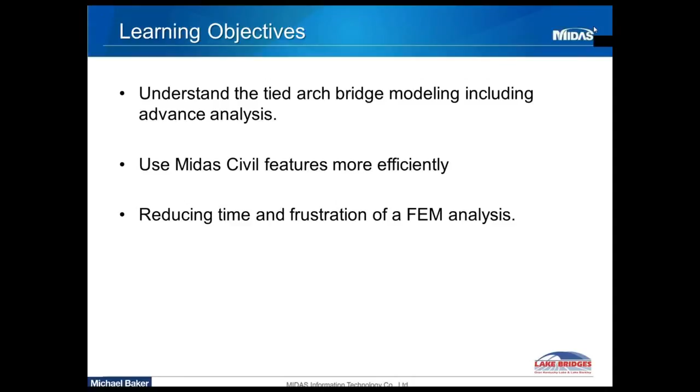What I'm going to talk about today is the modeling and analysis of the new Kentucky Lake Bridge, which is a 550-foot basket handle network tie arch bridge. Today's webinar learning objective is to understand the modeling of the tie arch bridge, including the advanced analysis. We'll also learn how to use Midas built-in features more efficiently, which will reduce the time and frustration during the finite element modeling.

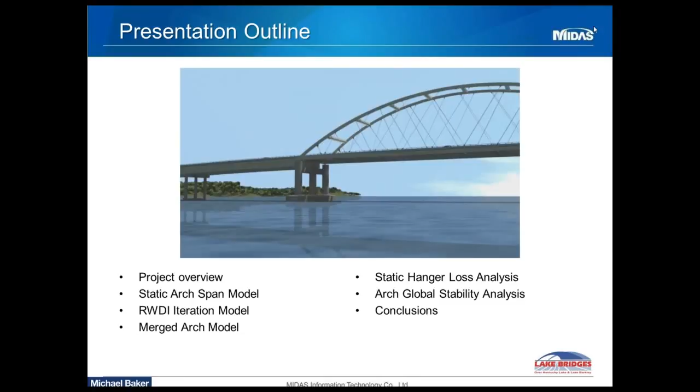Let's go through the presentation outline quickly. I'm going to talk about the project overview of the Kentucky Lake, then we will go through several different models, like the static arch model, the RWDI iteration model, the merged arch model with a local complex model, the static hanger loss analysis, followed by the arch global stability analysis.

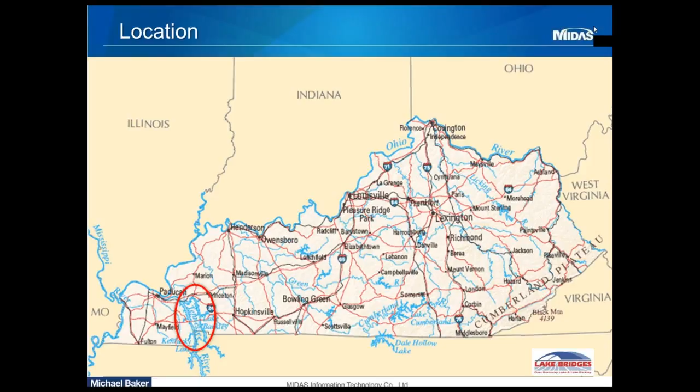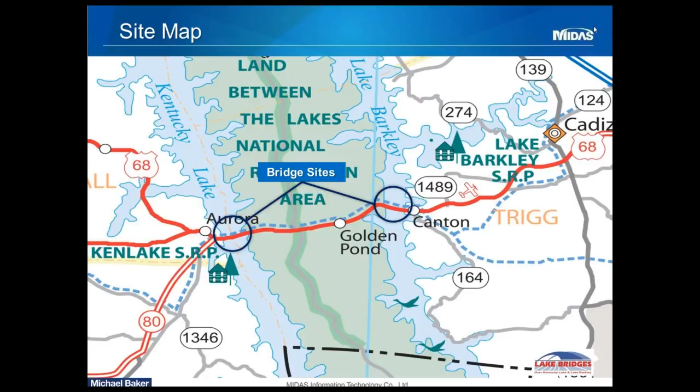So where is the Kentucky Lake project? It is located at the western part of Kentucky and provides a vital access point to the Land Between the Lakes National Recreation Area. Our client, Kentucky Transportation Cabinet, KYTC, will be replacing 2 of the bridges with identical tie arch bridges over Kentucky Lake and Lake Barkley. The Kentucky Lake crossing was awarded in December 2013, and the Lake Barkley crossing will be advertised a year later, by the end of this year.

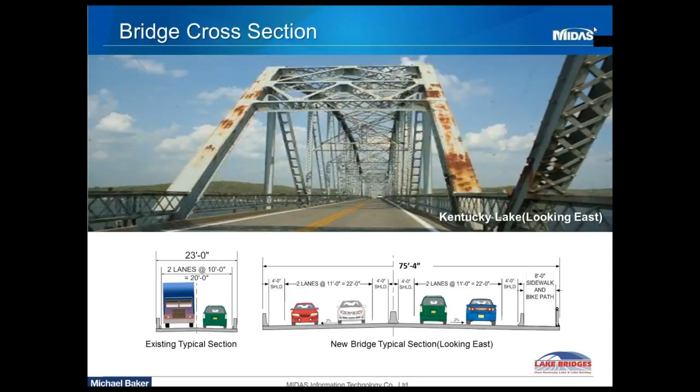The new bridge will replace the existing structurally deficient and functionally obsolete Eggner's Ferry Bridge, shown at the top of the screen. The existing bridge is only 2 lanes, 23 feet wide, a truss bridge. The new bridge, on the other hand, is 75 feet 4 inches wide, carrying 4 lanes of traffic with an 8-foot multipath or sidewalk across the lake on US 68 and Kentucky 80.

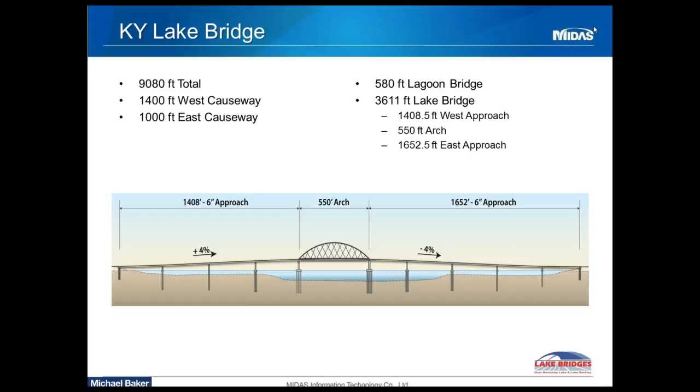The Kentucky Lake crossing is a total of 9,080 feet long, including a widening of the 2,400-foot existing causeway and also the 580-foot lagoon bridge, which is not shown on the screen. The west approach span is about 1,400 feet long, followed by the 550-foot tie arch bridge, and a 1,650-foot long east approach span. Both the west and east approach spans are continuous span welded steel plate girders. The general public and the Citizen Advisory Committee determined the signature structure to be the basket handle tie arch bridge for the main span.

Well, what is the tie arch bridge? In general, a tie arch is an efficient long span structure, and the tie arch imposes horizontal thrust because of the curvature of the compression ribs. The load path of the bridge starts from the deck hanging down from the hangers, and it ends up with the thrust coming down from the ribs to the knuckle, resolving into the vertical component that goes down to the bearing. The horizontal forces are carried by the tie girder.

So why did we pick Midas Civil as our finite element program? Because the Kentucky Lake tie arch bridge is a long span complex bridge, we need to build a rigorous 3D model for this project to determine the demand and to analyze the complex components of the bridge. Midas Civil is very user-friendly and has Excel-compatible table features that increase modeling pre- and post-processing efficiency. It also integrates with various advanced analysis tools, such as moving load, construction stage, eigenvalue, buckling, and nonlinear analysis.

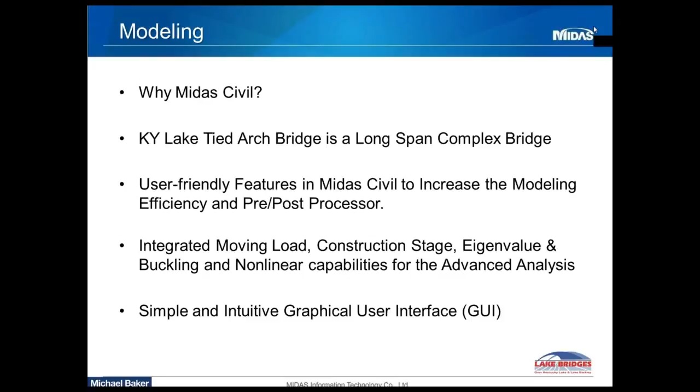Midas Civil is also equipped with a simple and convenient graphical user interface. Let's move on to the introduction to the modeling.

For me, I always ask myself, what is the purpose of the model? What are we trying to accomplish, and what are we trying to get from the model? We always start simple in the modeling, always doing a 2D model first, then evolving into a more complicated model. It's easier to debug a simple model than to debug a complex model later on. It's also important to understand the program's capabilities and limitations, what the program can do and what it cannot do, so that we can make certain assumptions in our analysis.

I always have a modeling checklist with 4 primary items. The first is the geometry of the model. The second is section and material properties of the model, the boundary conditions, and the last one is loading. It serves as a reminder and also a step-by-step guide for input into the model.

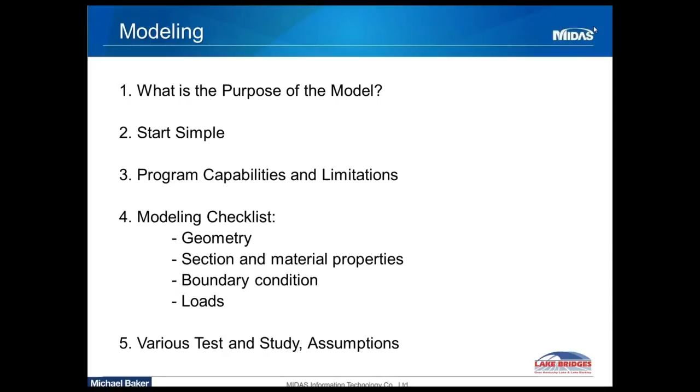The last is to perform various testing and study, and it's always good to do a simple benchmark problem so that you get familiar with the program and understand the analysis that we try to do later on.

Speaking of this point, we did a lot of design studies and analysis for the Kentucky Lake project during preliminary design phase. The first study that we did is to look at the network hanger versus vertical hanger on the tie arch bridge.

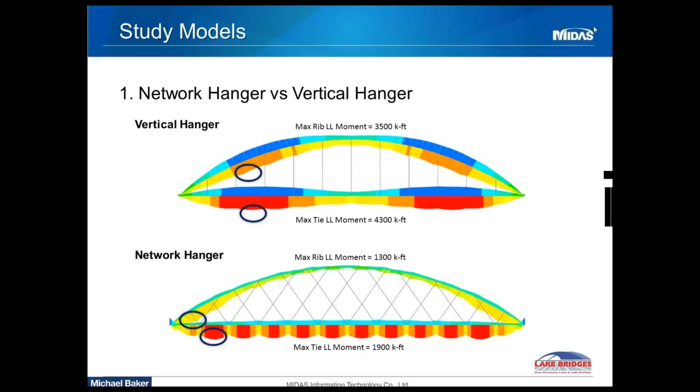The study demonstrated that the maximum live load demand on the tie and rib using a network hanger system is 40% of using vertical hangers. The numbers you see right now don't necessarily represent the actual live load demand used for the final design of the bridge, but it's one lane of HL93 applied to the bridge for the study, just for comparison.

The second study that we did for the Kentucky Lake is look at the integral floor system versus floating floor system. Basically, integral floor system is stringers framed into the floor beams directly, while for the floating floor system, stringers sit on bearings and connect to the floor beams.

The integral floor system offers several benefits, such as it eliminates the stringer bearings and joints from future replacement, while it also imposes a challenge to the deck system because it introduces a creep and shrinkage force from the deck to the stringers and to the connection, and introduces lateral bending stress to our floor beams.

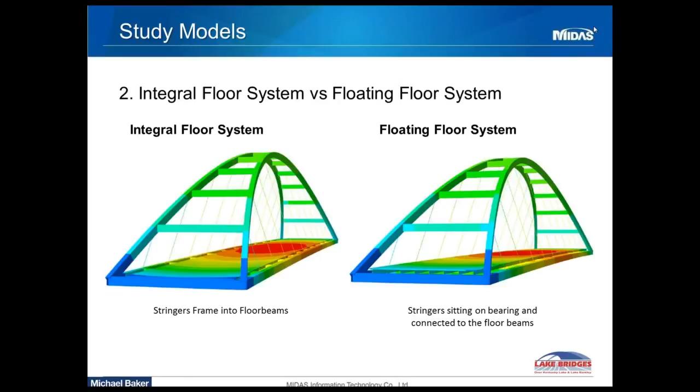However, the cost is much lesser to use the integral floor system compared to the floating floor system because of the maintenance and inspection of the stringer bearings. And finally, we selected the integral floor system for our final design of the Kentucky Lake bridge.

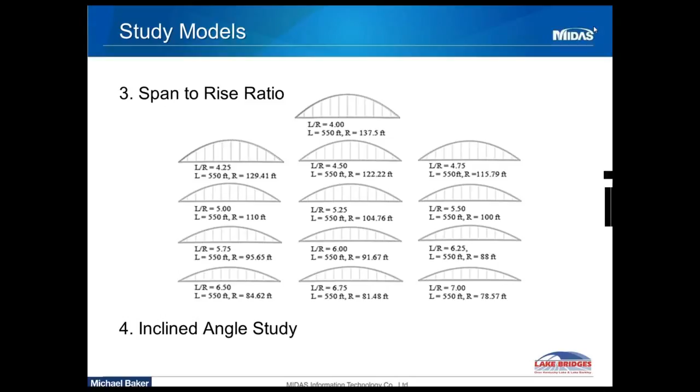We also looked at different span to rise ratio, varying from a ratio of 4 to 7, as you can see on the screen. We also looked at the incline angle study by looking at the lateral stability of the bridge, eigenvalue, and mode shape of the bridge with different incline angles.

The last study we did is to look at the multi-use path. Because the Kentucky Lake bridge is very close to the Kentucky Lake resort park, the need for the bike path was amplified. We looked at whether to place the multi-use path inside or outside of the arch.

Using Midas Civil allowed us to input pedestrian live load on the model, so it would generate the maximum live load effect to the bridge by doing both study, modeling inside and outside of the bridge.

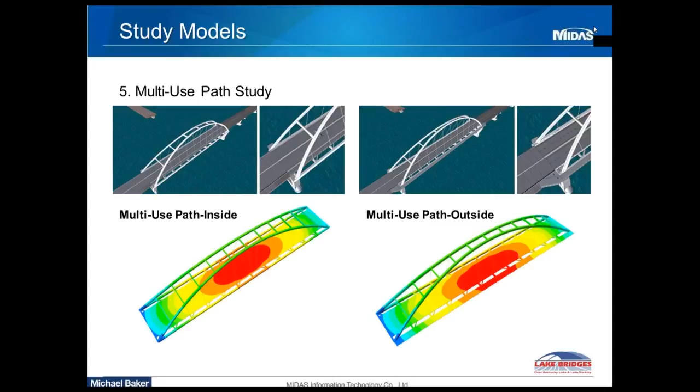We selected the multi-use path inside the bridge because it's preferred by our client to allow future widening of the lane, the live load, to become 6 lanes of live load.

So after multiple testing, study, and experiment, as you could call it, the simple model finally evolved into a final 3D arch model.

The final geometry of the Kentucky Lake bridge is 550 feet long from center line of bearing to center line of bearing. It is 94 feet wide from center line of the tie to center line of the tie. And it's 110 feet tall on the 15 degree inclined plane.

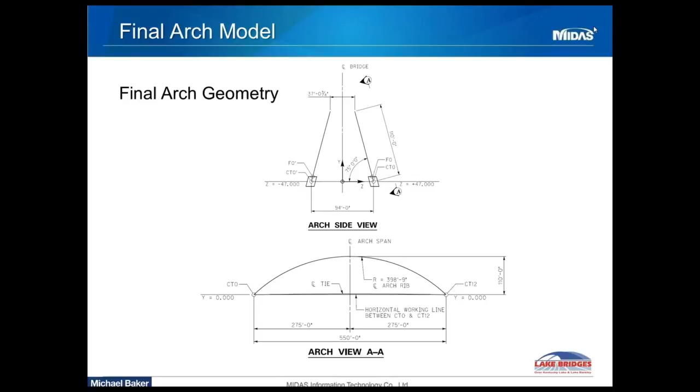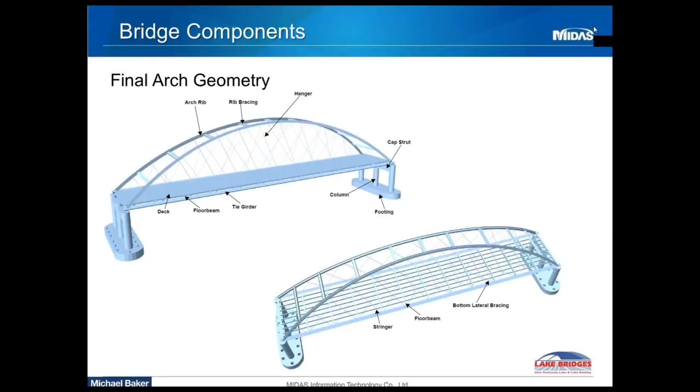On the final 3D arch model, we model everything as a beam element except the deck of the superstructure and the footing as a plate element or shell element. We model the hanger as a truss element, which I will explain later why we're doing it.

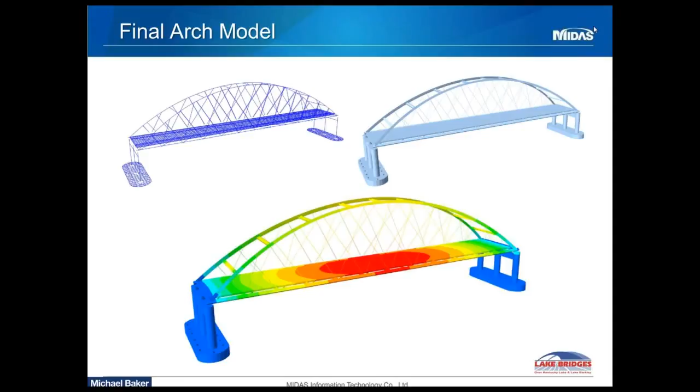Here are some of the screenshots from the final arch model. The final arch model is a linear model that allows us to do static analysis and allow the load superposition, which is preferable to facilitate the member design.

Because we're doing the linear model, we have to check the hanger, which is modeled as a truss element, to make sure that the assumed elastic modulus that we made is always true or valid to be used.

Midas allows the user to assign individual load cases, which is very helpful because if there's any changes to the load in the future, it can be updated easily.

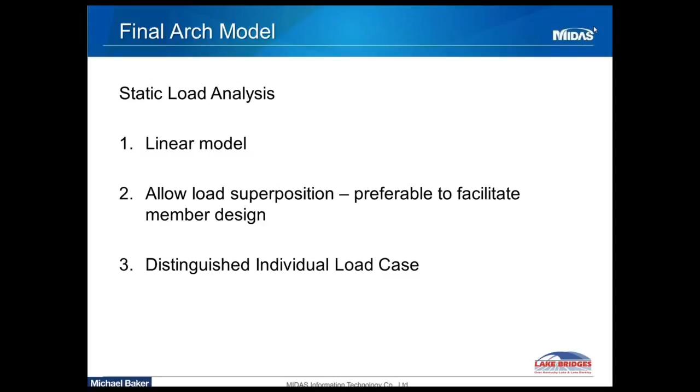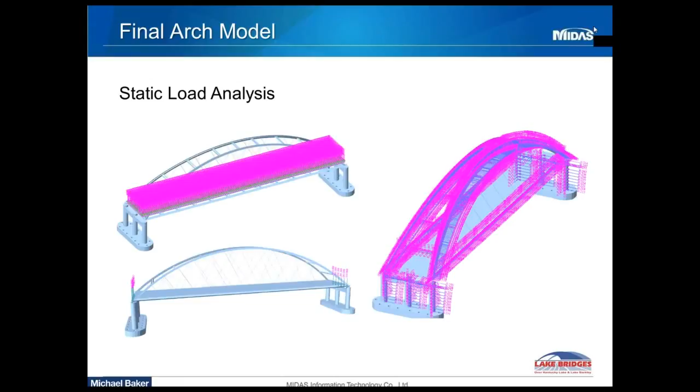A few examples that Midas allows the user to input different types of loading. First is the plate pressure load, which is applied as a future wearing surface on the deck. Midas also allows the user to input nodal loads, which we use in this case as the approach span bearing load. And the screen on the right shows that Midas allows the user to input beam element loads, which we use to apply our RWDI wind load to the model.

In this final arch 3D model, we also do construction stage analysis to simulate the real-time construction. On the Kentucky Lake bridge design and analysis, we assume the tie arch bridge is constructed on land and floated in.

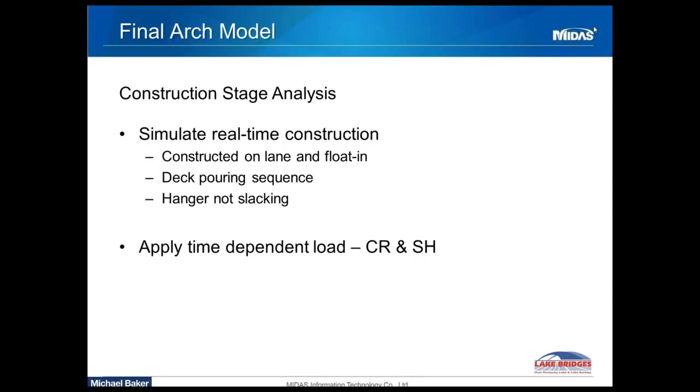We also include the deck pouring sequence in our construction stage analysis to check that our hanger doesn't go slack, and also to check that the hanger's assumed elastic modulus remains true, allowing us to use load superposition later on. We also apply the time-dependent load in our construction stage analysis, which is the creep and shrinkage load.

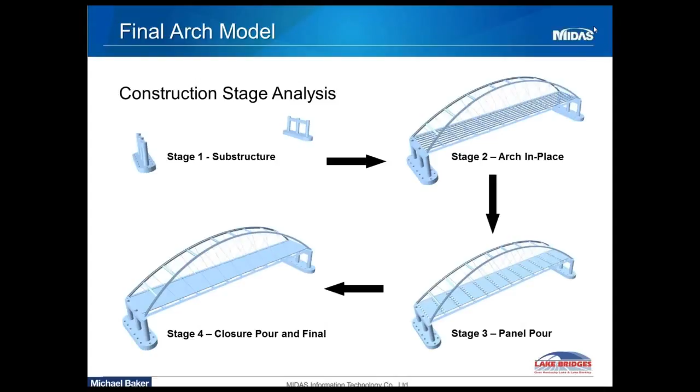These four figures show the construction stage that we assume in our analysis. It started with the substructure constructed in the first stage, followed by the float-in of the arch, and next is the panel pour of the deck. Then the last construction stage is the closure pour and the deck overlay.

Once the construction stage is analyzed, it will become the post-processing model for the moving load analysis. The moving load analysis in Midas is very useful because it can place the live load on the bridge to generate the maximum or minimum live load effect on the members.

In Kentucky Lake, future six lanes of live load were used, which includes the future widening of the bridge. Four-stripe-lane live load is used for hanger loss analysis and also the tie fracture design—I'll talk about the hanger loss analysis later on. Midas has the capability to allow users to scale up and model different live load that is not included in the live load library of Midas.

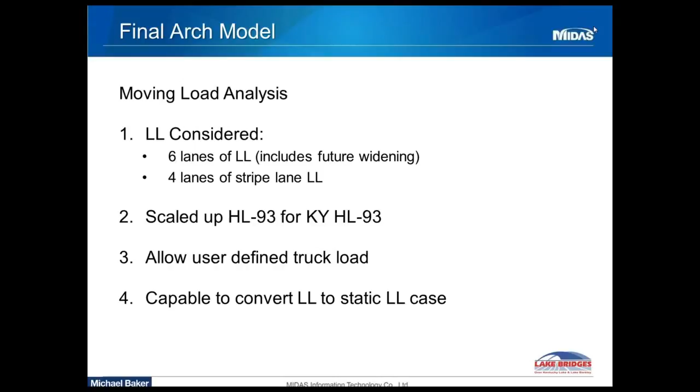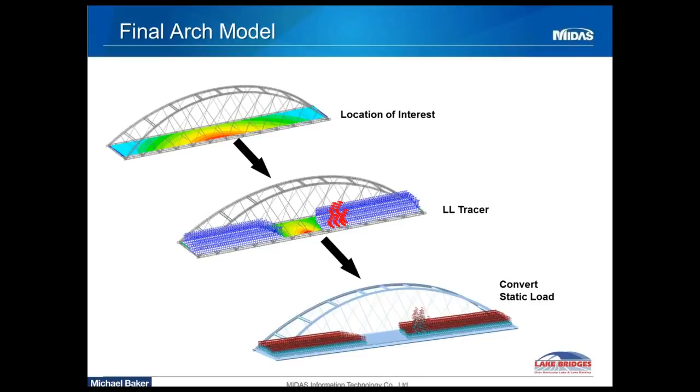Another helpful feature is that it allows users to convert the critical live load to a static load case. For example, we are interested in the critical forces of one of the members of the arch, let's say on the middle of the bridge tie location. So in Midas we can use the Midas live load tracer to show us the live load pattern that generates the critical live load case, and then we can convert this live load pattern to a static load case, which is very helpful for our advanced analysis.

Baker retained RWDI to conduct a wind engineering study on Kentucky Lake Bridge, and we are required to provide the structure mass and eigenvalue analysis result to RWDI for the wind buffeting analysis and the wind tunnel study.

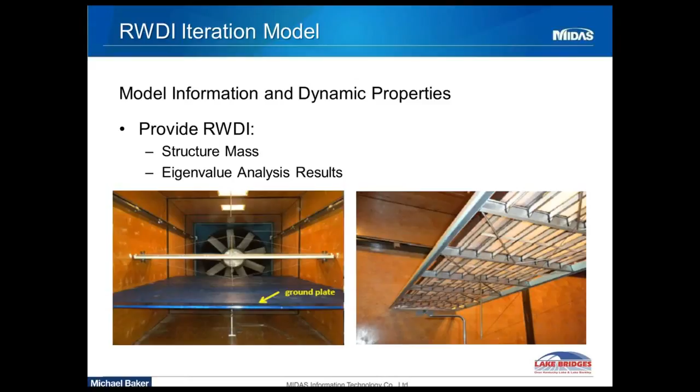Midas is capable of performing eigenvalue analysis, and the dynamic results can be easily extracted in table format from Midas.

Because the bridge is supported by deep pile bents and waterline caps, we do the substructuring between the deep foundation and anything above. The deep foundation will show its model in another program, so we have to do iteration between these two programs to come out with the converged 6x6 stiffness matrix.

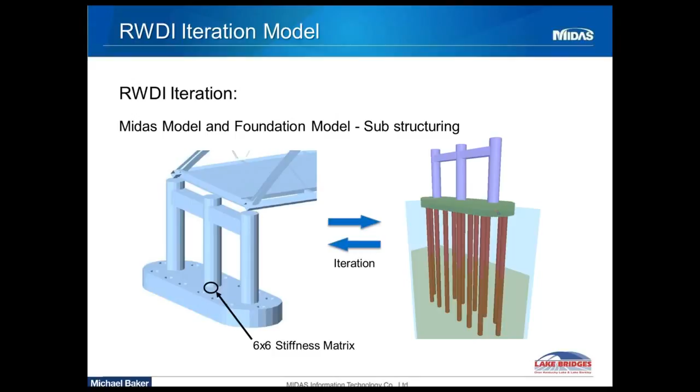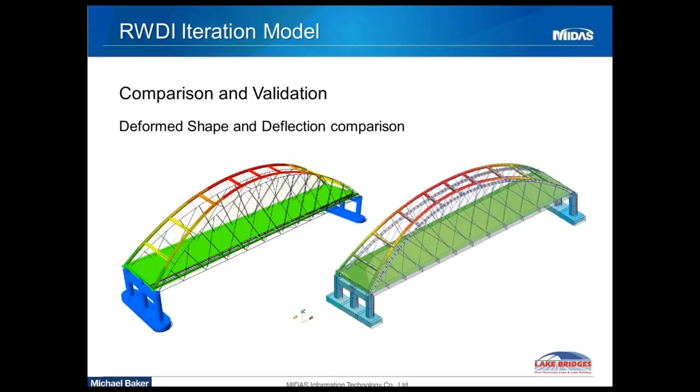Then we provide this information back to RWDI to finalize their wind tunnel study. RWDI will send us back the RWDI wind load, static wind load, to be applied in the Midas model. There are a total of 28 load cases of RWDI wind load that we need to apply into the model. The last step is to compare the deformed shape and deflection magnitude for the 28 load cases with what was provided by RWDI, to make sure that the result and the load applied is valid and comparable.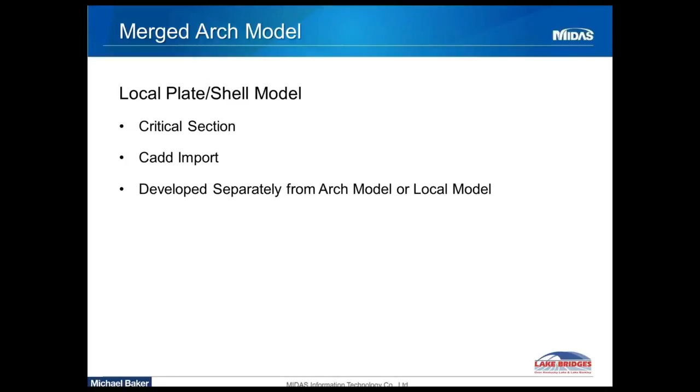Then we extend our modeling effort to develop the local plate and shell model to analyze and look at the critical sections of our bridge. Midas has the capability to import CAD files and convert them to a finite element model, which is very helpful because different people can develop the model separately and merge it together later on.

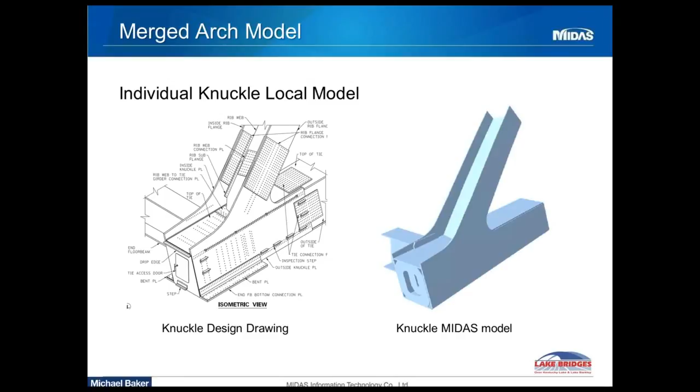One of the most critical sections for an arch bridge is the knuckle, which is located at the intersection between the tie girder, rib, and end floor beam. A knuckle is a highly stressed area, complicated by its geometry for fabrication. As you can see, on the left is the drawing of the knuckle, and on the right is the knuckle Midas model.

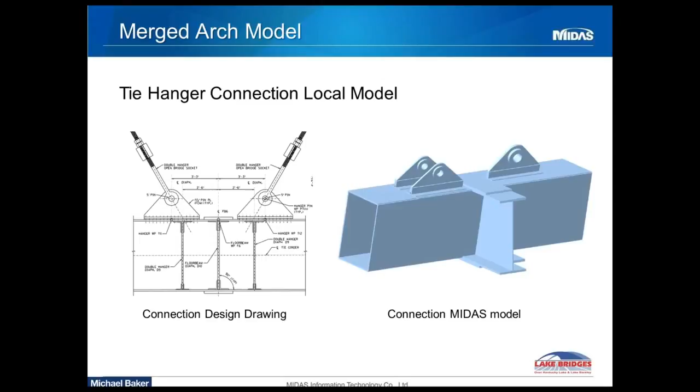Another section we are interested in is the tie hanger location. These two sections will merge into our arch model, which I have shown previously, and we analyze the model to get the demand from the merged model and compare it with our hand calculation. This really increases our confidence in the complex member and connection design.

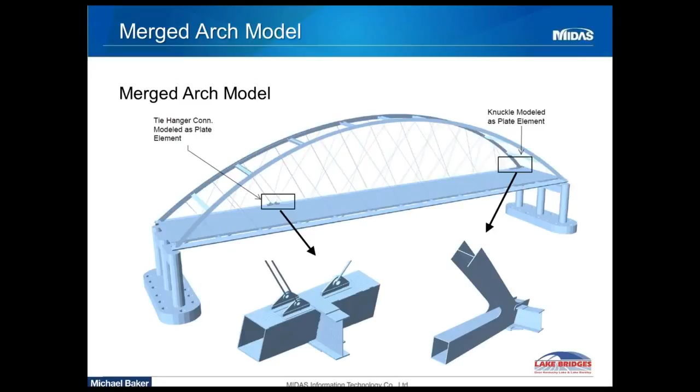In order to connect the local plate shell model to our beam model, we use a transition element called a spider link. The spider link is actually a beam element which is very stiff flexurally, but with a moment release or pin at the plate elements, thus preserving rotational continuity without applying in-plane bending on the plate elements. The link is very soft axially and allows the Poisson effect in the plate elements without over-constraining the member and creating false stresses.

We impose the limit of the detail model using engineering judgment and by applying St. Venant's principle, which means that the boundary condition is set at least a girder depth away from the area we are interested in looking at.

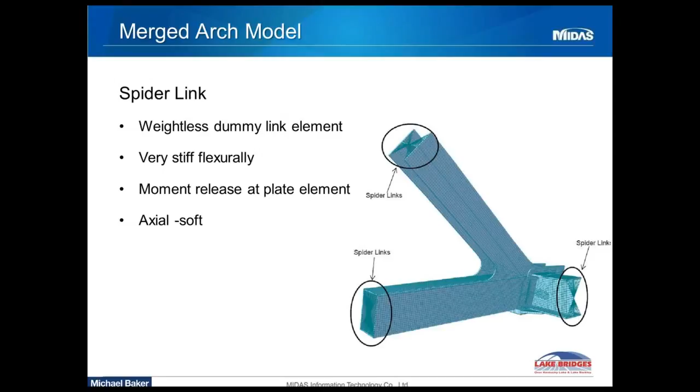So we design the knuckle by checking the effective stresses or equivalent stresses of the element, by imposing the Von Mises criterion. It can be seen that the higher stress originates from the ribs and flows through the knuckle plate and to the bearing, shown on the left side of the screen.

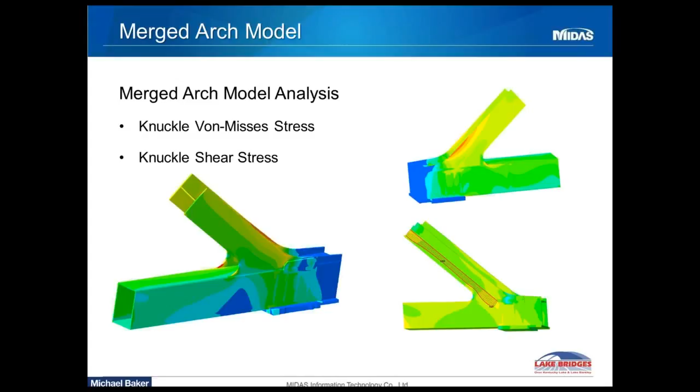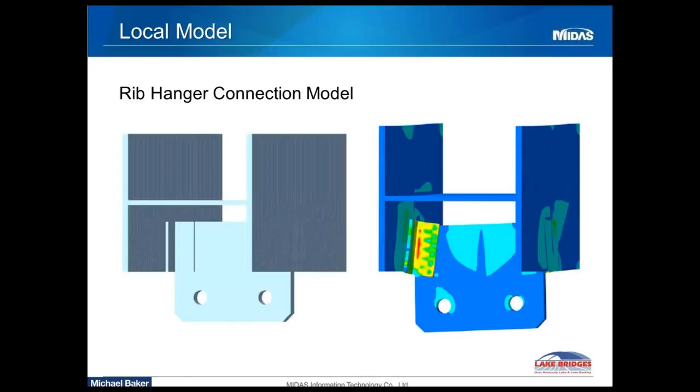Another local model that we built is to check the connection design of the hanger to the ribs. So we perform nonlinear material analysis to predict the connection stresses. Here's a quick animation of the analysis.

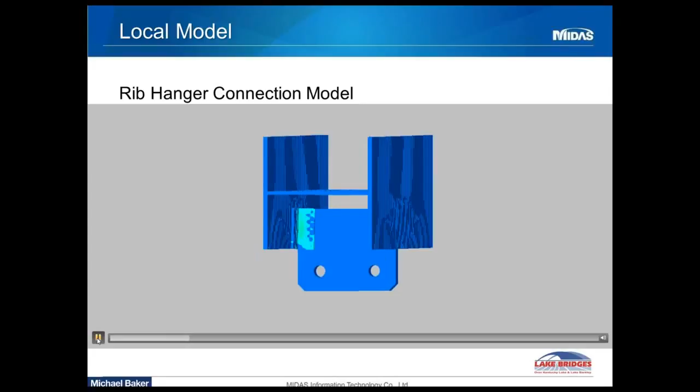Next, I'm going to talk about the static hanger loss analysis. The hanger loss, or hanger exchange, is analyzed in accordance with the PTI recommendation for stay cable design, testing, and installation, 6th edition.

So here are the cable loss and cable exchange load combinations. For cable loss, it's 1.1 DC plus 1.35 DW plus 0.75 live load and impact, plus a 1.1 factor of the cable loss dynamic forces. I will explain what the cable loss dynamic forces are on a later slide.

But the live load that we use in the cable loss is actually the full live load placed in the striped lanes, which is four striped lanes for the Kentucky Lake bridge.

The cable exchange uses 1.2 DC, 1.4 DW plus 1.5 live load and impact, and also the cable exchange force. But the live load used in the cable exchange is actually at least one lane of the live load shifted away from the cable under exchange.

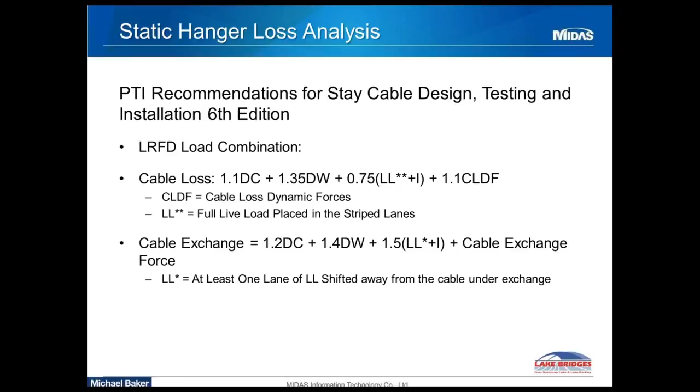So for Kentucky Lake, we use the four striped lanes of live load for the cable loss, and two lanes shifted away for the cable exchange load case.

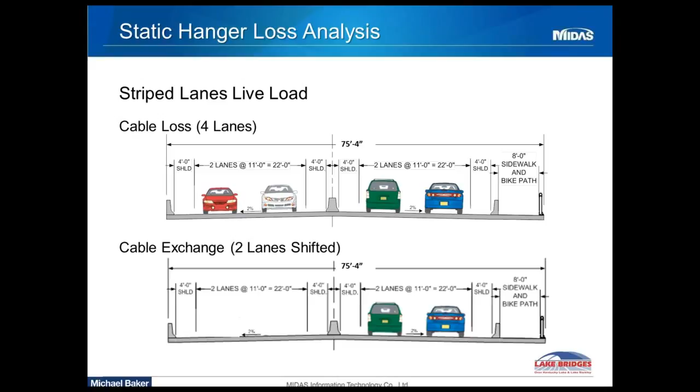There are 3 basic steps to perform the static hanger loss analysis. First step is to apply the dead load to the base structure with all cables intact, which we call System 1 model. We can use the construction stage model to capture the dead load of the structures.

It is also followed by applying the live load to the same base structure with all cables active. This is how Midas uses the post-construction stage model and applies the live load on it.

The last step is to take the maximum dead load and live load of the hanger from Midas and multiply it with the dynamic factor of 2, then apply it in the opposite direction of the original cable tension force with one of the cables removed. We call this model System 2.

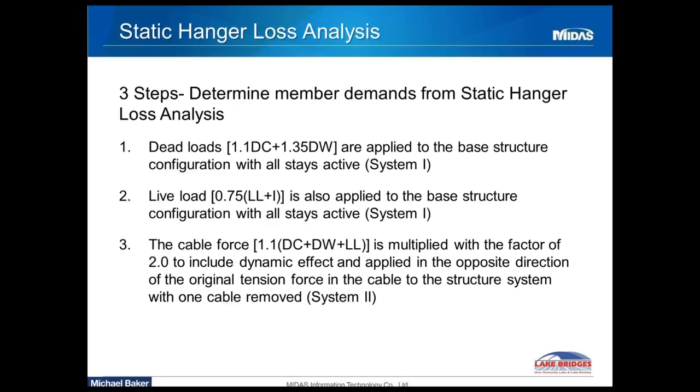I mean, pictures tell better than 1,000 words. So the first model is the System 1 model, which is the base structure with all cables active. This basically represents the construction stage analysis model that we've done, capturing all the dead loads of the arch.

Then the second step is basically using the same model with the live load applied on the bridge. Then the System 2 model is used to obtain the cable loss dynamic forces.

So basically it's by removing one cable from the System 1 model and applying the dead load plus live load, with the 2.0 dynamic factor applied in the opposite direction where the cable is removed, to get the System 2 forces.

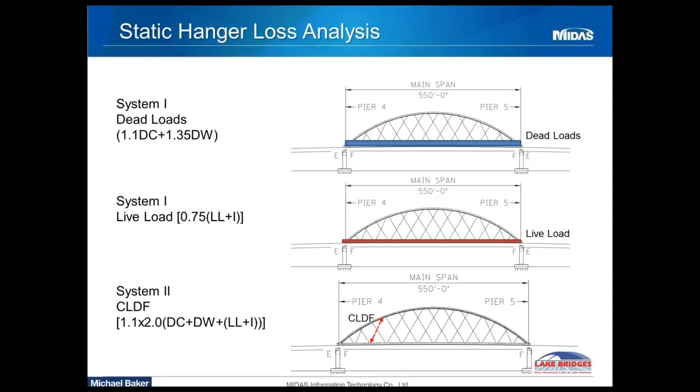These forces are then superpositioned, becoming a static hanger load combination used to design the components of the arch. As shown in the figure and chart, you can see that the cable loss introduces a large in-plane moment to the ribs and tie.

This is one load case by removing one of the hangers, and it needs to be done for all the hangers on the arch.

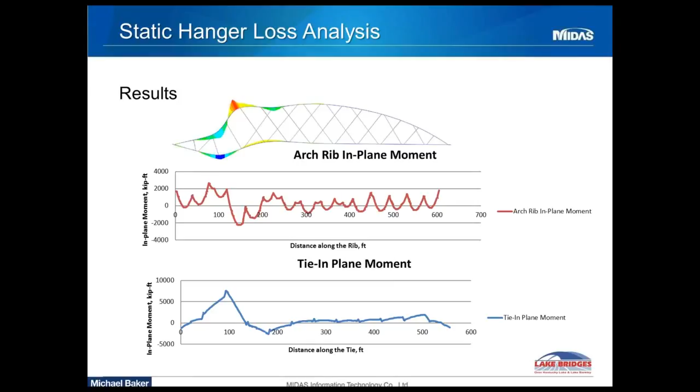The last analysis I'm going to talk about today is the global arch stability analysis. One of the objectives of performing the stability analysis is to ensure the arch does not buckle globally before the yielding of the structures.

We utilize two methods for the Kentucky Lake project. First is the linearized buckling analysis, also called linearized eigenvalue analysis, performed on un-deformed structures with consideration of the full geometric stiffness matrix. This can be easily accomplished in Midas Civil because it's built in with buckling analysis. This analysis provides a theoretical solution for the buckling modes of the structures.

The second method is a full geometric nonlinear analysis. The geometric nonlinear analysis is an incremental iterative procedure carried out on an imperfect geometry of a structure to compute the second order effects on the internal force.

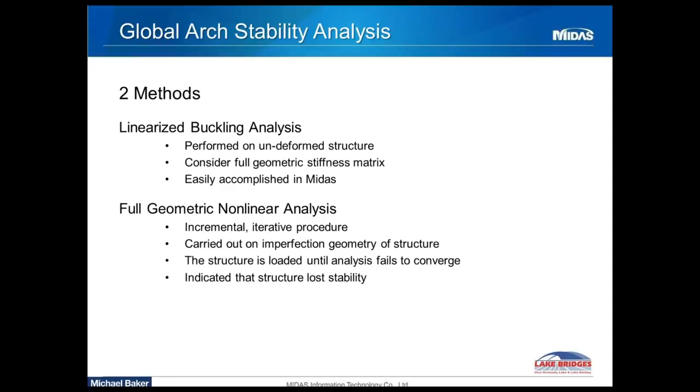So when such an analysis is performed, the resulting buckling factor shall satisfy certain limits that we use in the project, which are not really codified. Using engineering judgment and previous experience from past projects, the limit we use is 2.5. So lambda, which is the eigenvalue from the linearized buckling analysis in Midas, needs to be more than 2.5.

As for the full geometric nonlinear analysis, lambda is the last load step that fails to converge.

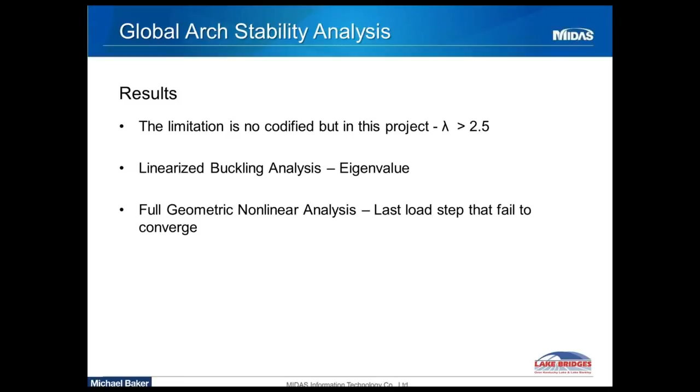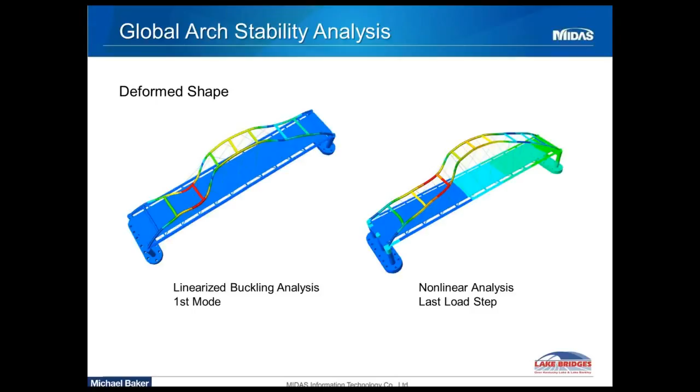The lowest buckling factor that we gain from the linearized buckling analysis is more than 4.0, while the nonlinear analysis gives 3.6.

I want to wrap up today's presentation with the lessons learned from this project. The first lesson is that we always start simple in our modeling and progress into a more complicated model.

We also need to understand the capabilities and limitations of the finite element program, and don't be shy to always perform study and benchmark testing to get a better understanding of the program and the analysis we would like to perform.

The last but not least lesson is to remember that one model could not do it all. Different models are used to accomplish different goals.

The goals were met with challenges along the way, solved by the close collaboration and support of the project team. After completion of the bridge, the Kentucky Lake Main Span will be the first network tied arch bridge in the state of Kentucky. Thank you.

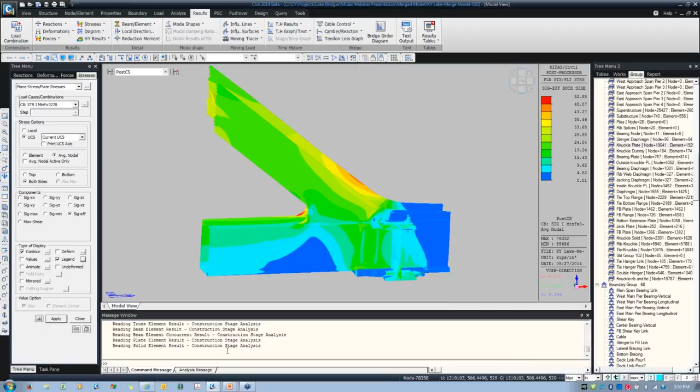Here is another model. It's very fine meshing, so it takes a while just to output the graphics that we are interested in looking at. Right now we're looking at the effective stress of one of the load cases at the knuckle.

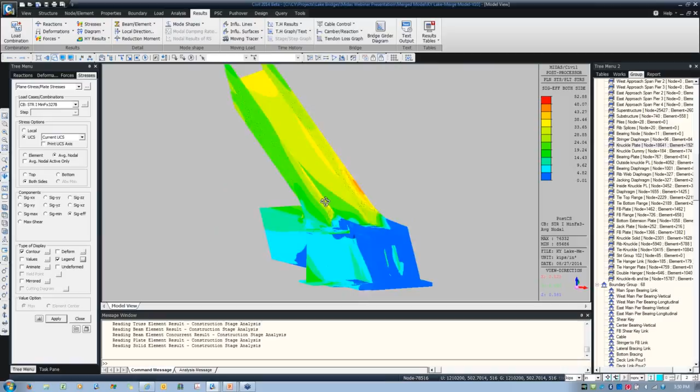Then this is our 3D arch model. So we have different load cases applied as static load cases on the individual load case.

And this is one of the models that generates the live load to be converted into a static live load.